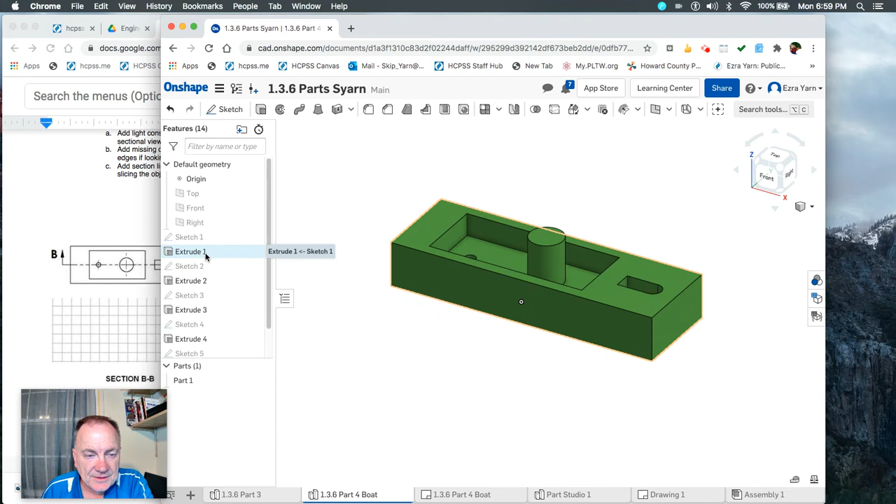The first thing I did is I created a rectangle that was 3 inches wide by 0.5 inches tall. Then I simply extruded it, and it looks like the extrusion was 1 inch going to the back. You'll need to stop and start this video over and over in order to get the exact dimensions. However, the dimensions are not all that required or necessary, as they told us to build this and kind of make it up.

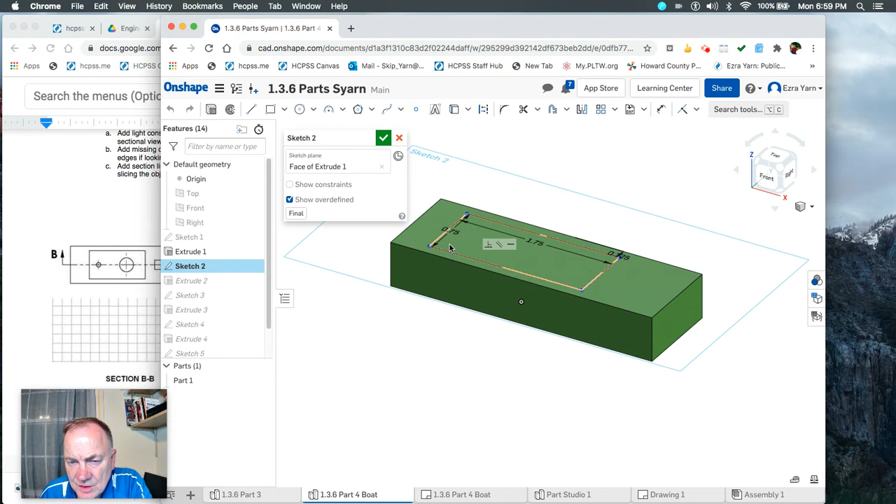The second sketch I created was this sketch right on top. You can see it's 1.75 inches long, it's 0.75 inches wide, and the distance between the top and the side here happens to be 0.125. So that's pretty easy to see. And the extrusion for that particular item went down by 0.25.

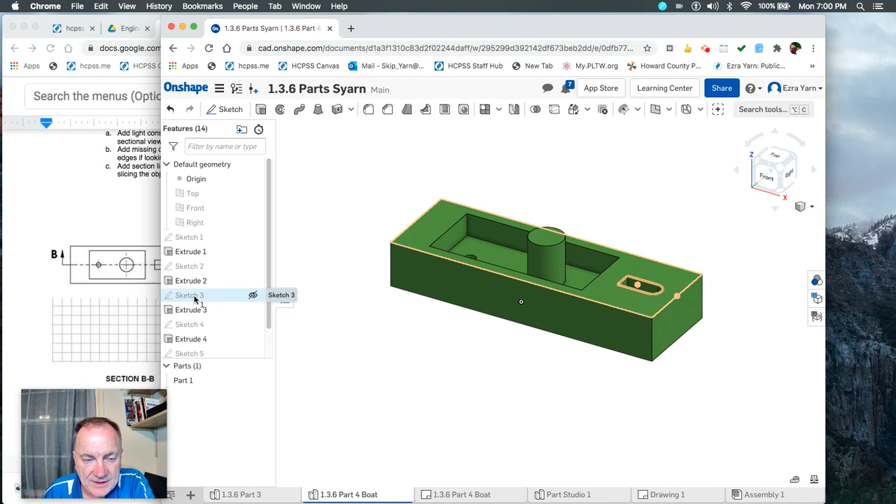The next thing I created was sketch 3. I'll spin this around so you can see it on the top. Looks like it's 0.2 inches wide. It's centered on the center line of the boat. It's 0.25 inches from this edge to this edge. And from one end of the other end of the rectangle is 0.35 inches.

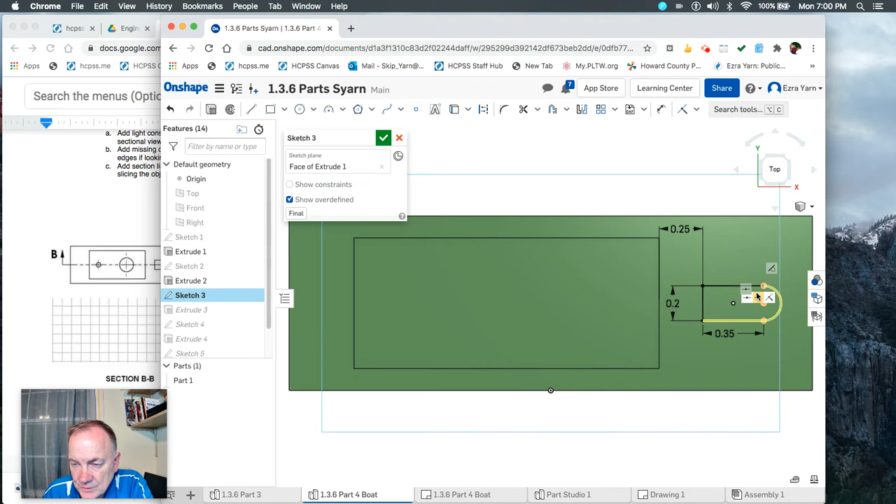I simply put a circle here and trimmed out this side of the circle and trimmed out the 2 inner legs of the circle. So I have this, it looks kind of like a half of a slot. If this were curved around the other way, it would be a slot. And then we simply put it approximately where it needed to be. Remember, these are all approximations.

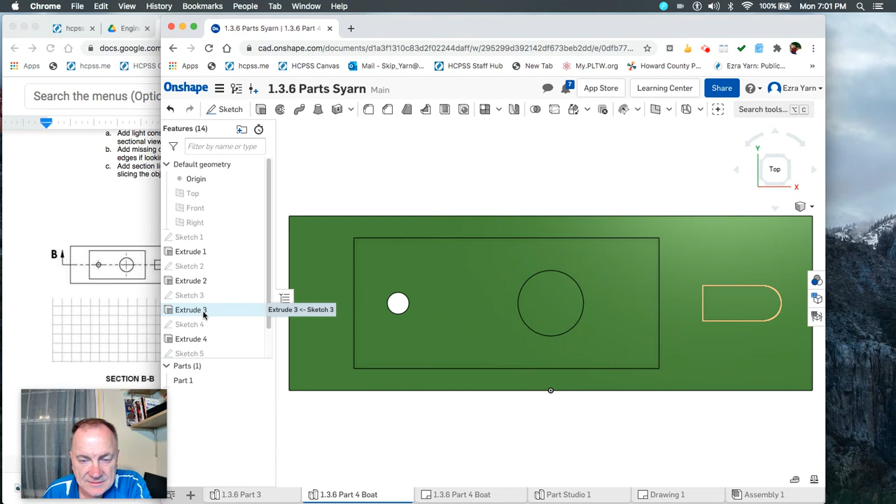And then I extruded or made that extrusion. Let's see how big that extrusion was. That extrusion dropped down by 0.325. I put in a mathematical formula, but here's what it gave me, 0.325.

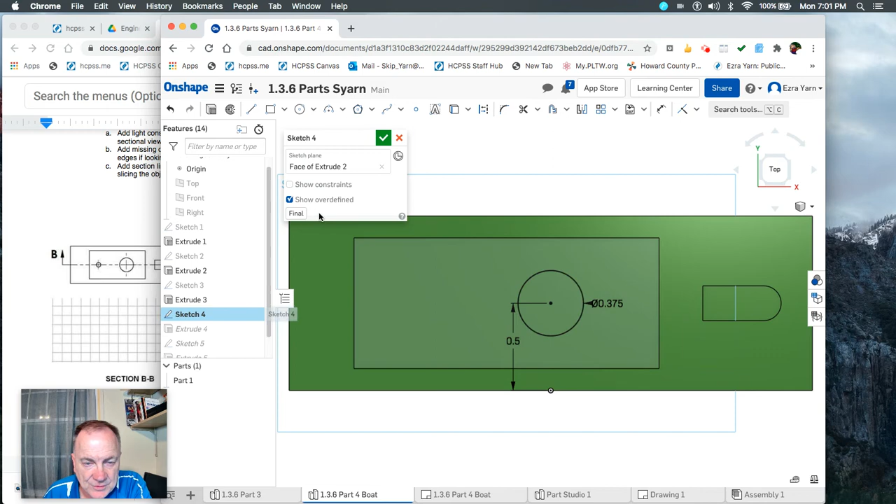Next, I created a couple of more sketches here. One sketch is the circle here. Let's see what it tells us as far as the size is concerned. It looks like the diameter is 0.375, and the distance from the bottom to the center is 0.5, and it's located horizontally in the center of that rectangle, of the major rectangle. And I simply extruded that.

And the last thing was the hole here. It also is on the center line horizontally, 0.5 from the bottom. The size of the hole was 0.125, and the distance from the back edge is 0.625.

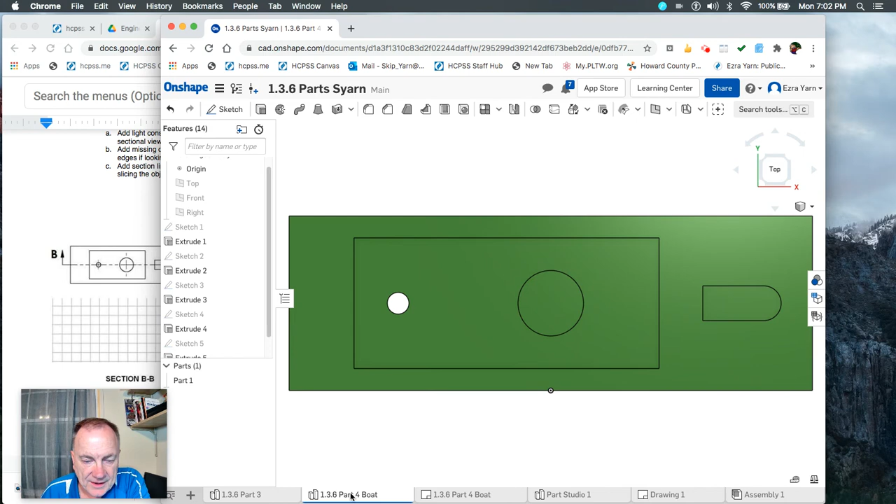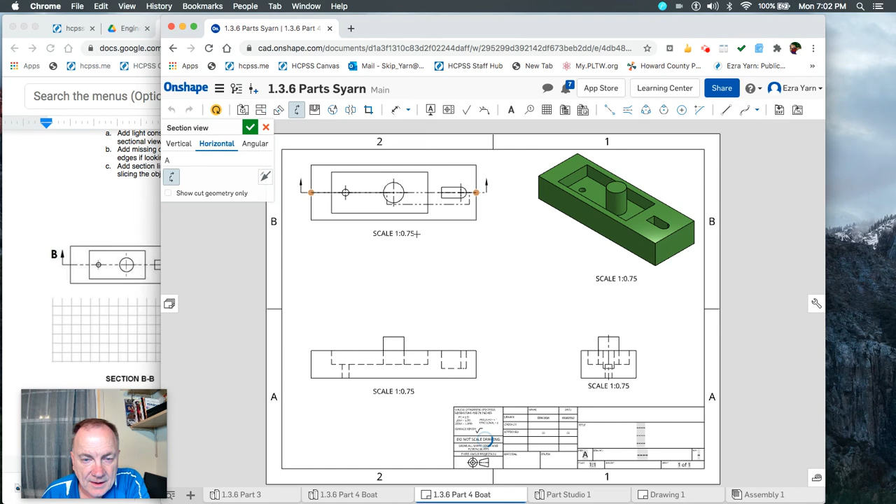The last thing we have to do is create a section view. So we create a section view by clicking on the section view command. Coming down to the center, we need a horizontal view, and we simply click and drag through the center of the item. And we simply pull down and place our view.

Notice we now have a section view when this finishes populating, and we can replace, we'll click on that front view, hit delete. We can replace the front view with the section view. Now, one of the nice things about the section view is that we can now use this to put in our dimensions. So we're not dimensioning hidden lines. We're dimensioning stuff that's on the middle.

And that's all there is to it. It's actually pretty simple. I hope this helps. Make sure you align the different sides here so these are all lined up. And I think we are good to go. Hopefully that solves the problem for you.